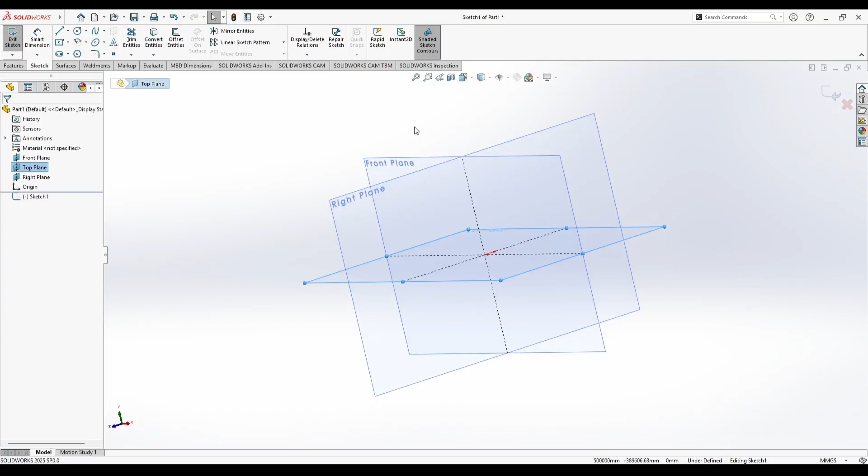This is a complete tutorial where we will go step by step through the modeling process, focusing on how to approach complex product design and break it down into simple, manageable parts.

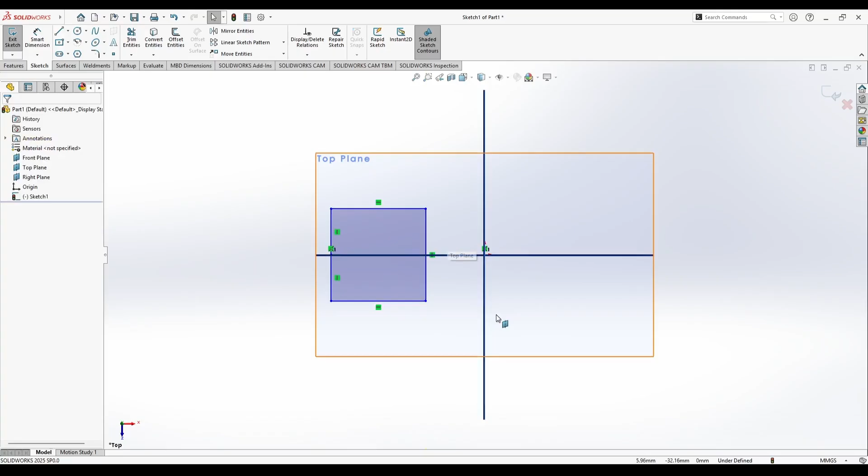We begin by understanding the overall structure of the GPU and setting up the base dimensions. Instead of jumping into details immediately, it is important to start with a clean foundation by creating the main body using simple sketches and extrusions. This gives us a solid reference for adding all the other features later.

Keeping your sketches fully defined and organized at this stage will make the entire modeling process much smoother and more controlled. Once the base is ready, we start building the outer casing.

This involves adding thickness, applying fillets, and shaping the edges to match the real design. The key here is to focus on proportions and symmetry rather than perfection in the first attempt. You can always refine details later, but having the correct overall form is essential. Using features like fillet and chamfer helps in achieving smooth transitions and a more realistic appearance.

After that, we move on to one of the most recognizable parts of the GPU, which is the cooling fan. Instead of modeling everything at once, we create a single fan by designing the hub and then building the blades using patterns. Circular patterns are extremely useful here, as they allow you to replicate one blade across the entire fan evenly.

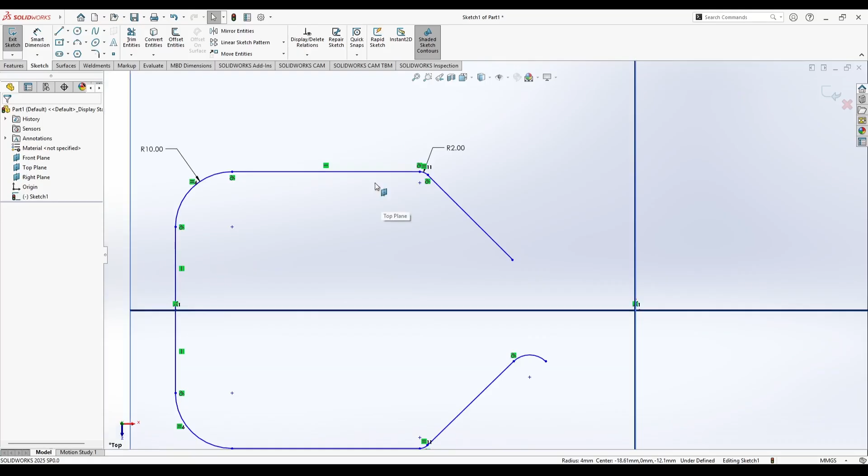Once one fan is complete, it becomes much easier to duplicate or mirror it to create the second fan, saving time and maintaining consistency.

Next, we focus on adding smaller details that bring the model to life. This includes features like mounting sections, vents, and cutouts. These elements may seem minor, but they play a huge role in making the model look realistic and complete.

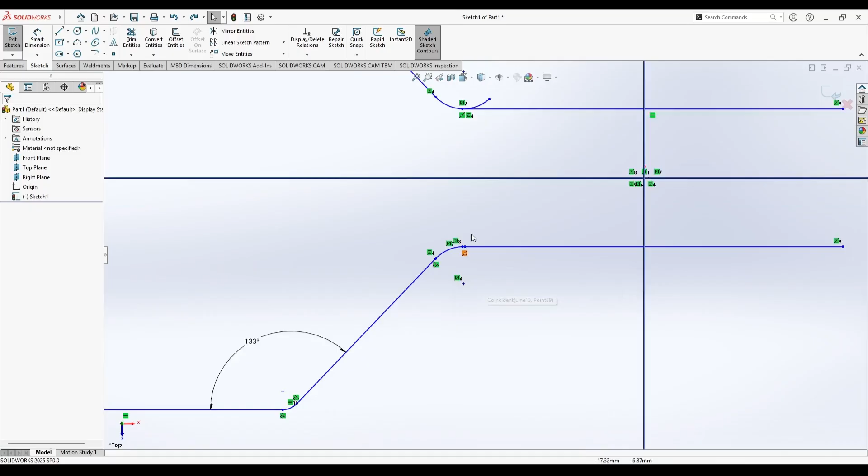At this stage, using reference images can help you understand where to place these details and how they should look. The goal is not to copy every dimension exactly, but to capture the visual essence of the design.

As the model becomes more complex, maintaining a clean feature tree becomes very important. Naming your features, organizing sketches, and following a logical sequence will help you avoid confusion later. This is especially useful if you need to make changes or improvements to the model. A well-structured workflow is what separates a beginner from a more advanced CAD user.

Once the main structure of the GPU is complete, we shift our focus toward refining the model by adding more detailed features and improving overall accuracy.

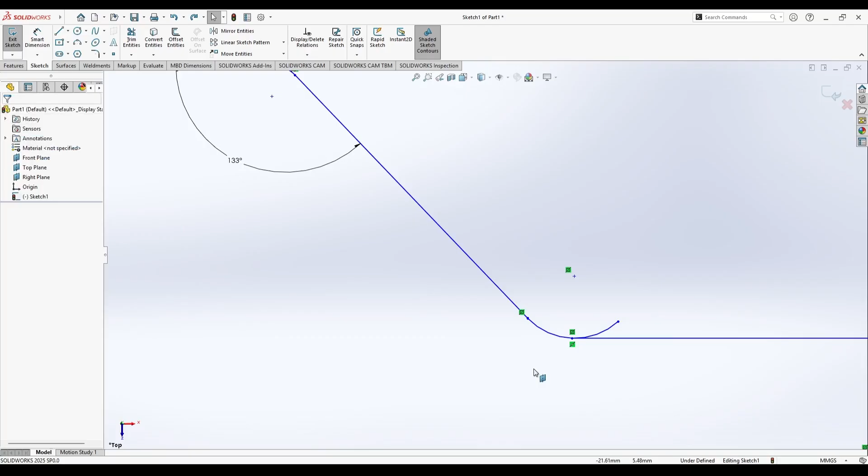This stage is all about enhancing the design step by step, starting with secondary features like edge cuts, grooves, mounting sections, and ventilation areas. Instead of rushing into complex geometry, the idea is to carefully observe the reference design and gradually introduce these elements using simple tools like extrude cuts, patterns, and fillets.

This approach helps maintain control over the model and avoids unnecessary complications. At this point, it becomes important to think about how different parts of the GPU are logically built.

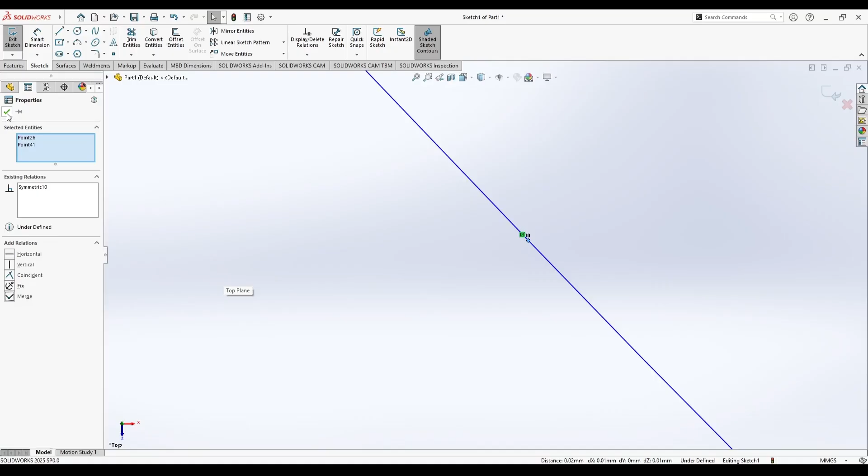Rather than treating it as a single object, breaking it into sections such as the casing, fan housing, and structural supports makes the workflow much more manageable. Each section can be modeled independently and then combined to form the complete design. This not only improves accuracy, but also makes it easier to modify specific parts later without affecting the entire model.

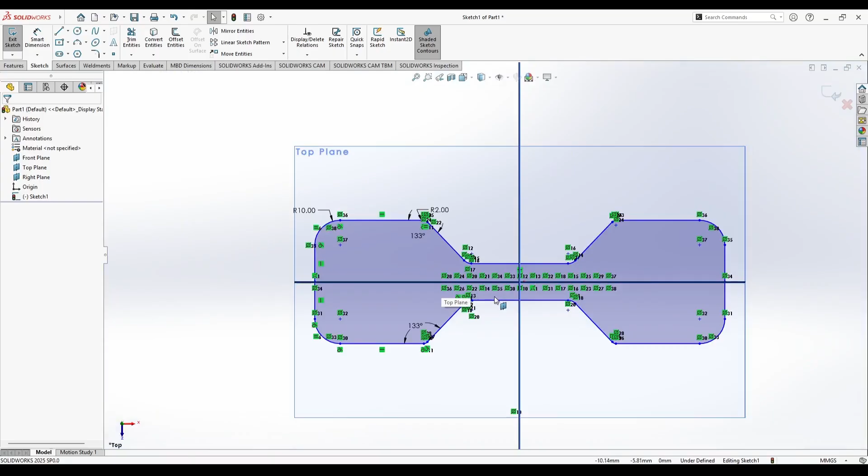As we continue, symmetry plays a major role in speeding up the process. Features like fans, vents, and repeated patterns do not need to be created multiple times from scratch. Instead, tools like mirror and circular pattern can be used to replicate geometry efficiently while maintaining consistency. This not only saves time, but also ensures that the design remains balanced and aligned.

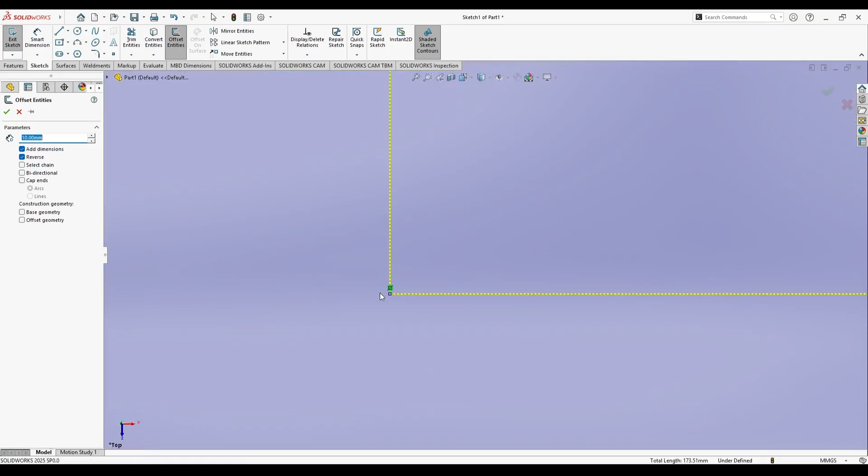Another key aspect during this stage is maintaining clean and well-defined sketches. Many beginners face issues because their sketches are not fully constrained, which leads to unexpected changes later in the model. By fully defining sketches and using proper dimensions, you ensure that your design remains stable and predictable. This becomes especially important when working on complex models like a GPU, where small errors can affect multiple features.

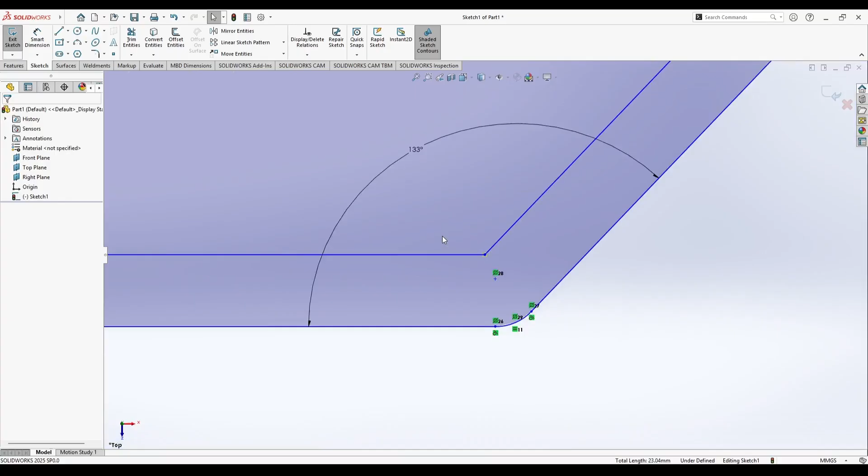As more details are added, the feature tree naturally becomes larger, so organizing your workflow is critical. Renaming features, grouping related operations, and following a logical order will help you stay in control of the design. This also makes it easier to revisit and edit specific features if needed, which is a common requirement in real-world projects.

As we move further into the modeling process, the focus shifts toward capturing finer details that make the model look complete and realistic.

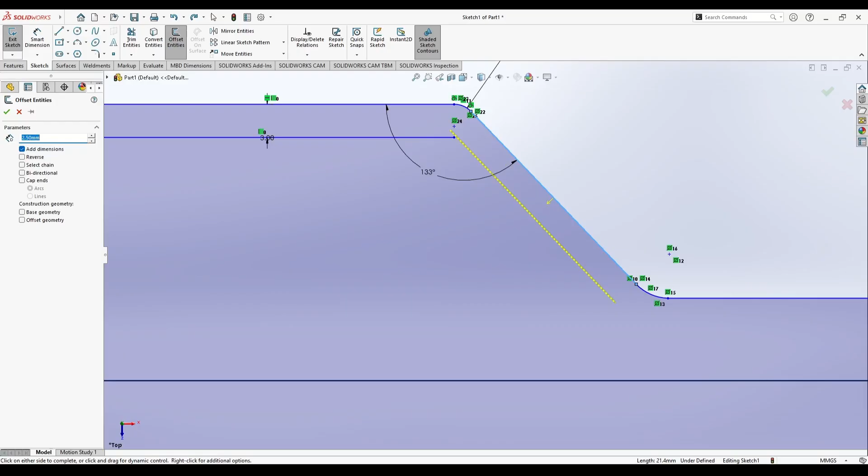At this stage, it is important to carefully observe the reference design and identify repeating patterns, small geometric variations, and functional elements that define the overall appearance of the GPU. Instead of trying to recreate everything in one go, the idea is to isolate each feature and build it step by step. This could include refining edges, adding subtle cutouts, and shaping transitions between different surfaces so that the model starts to resemble a real product rather than a rough structure.

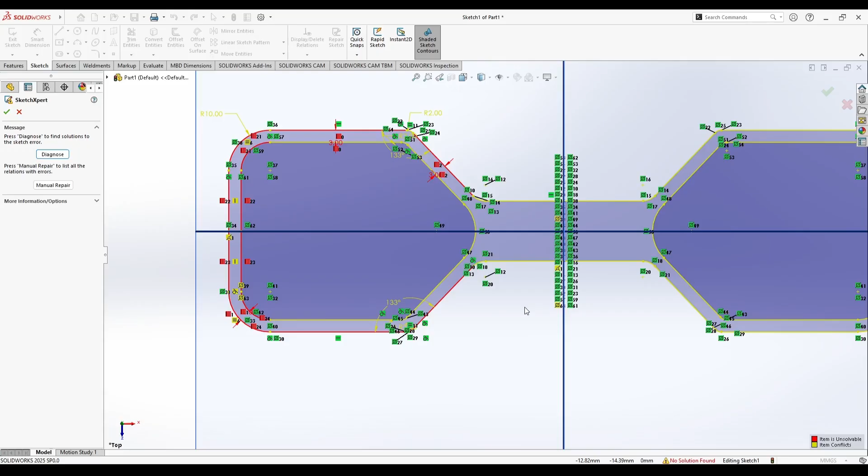One effective approach during this phase is to think in terms of layers. Start with the primary geometry, then move to secondary features, and finally focus on micro-level details. This layered workflow ensures that your model remains clean and organized, and it prevents errors that usually occur when too many features are added without a clear structure.

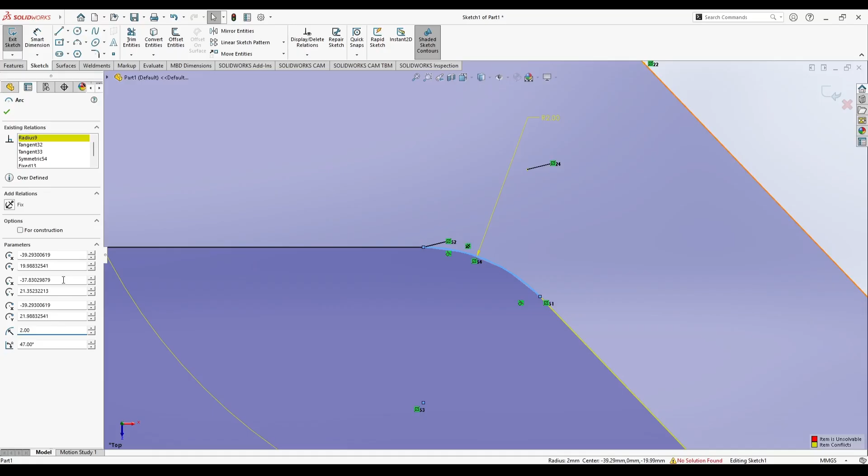For example, once the main body and fan housing are complete, you can begin adding ventilation slots, screw placements, and small design accents that enhance realism. These details might seem minor individually, but together they significantly improve the overall quality of the model.

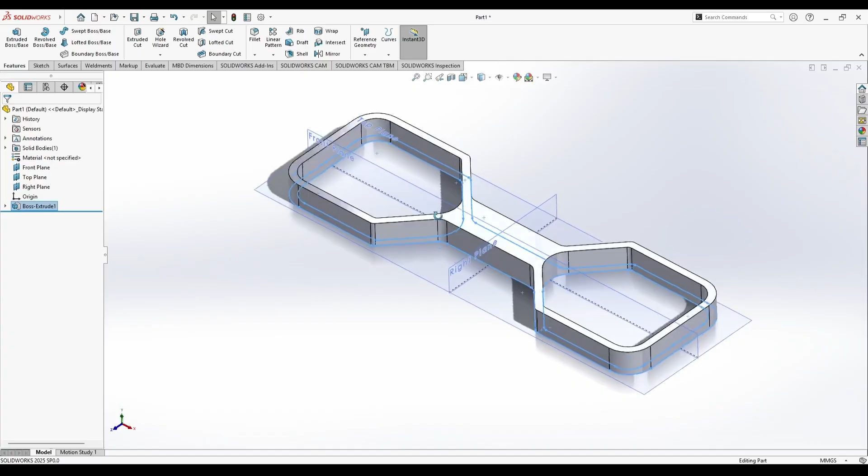Another important consideration is the use of reference geometry, such as planes and axes. These tools help you position features accurately and maintain alignment throughout the design. When working on complex shapes or angled features, creating additional reference planes can make sketching much easier and more precise. This is especially useful when dealing with non-standard geometries or when certain features are not aligned with the main planes of the model. Proper use of reference geometry not only improves accuracy, but also makes your workflow more efficient.

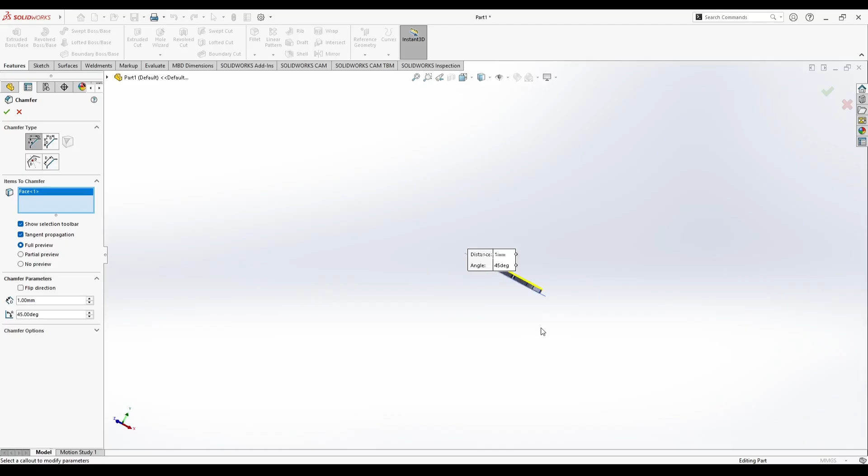As the model grows, it becomes essential to manage relationships between different features. SolidWorks allows you to create dependencies between sketches and features, which can be very powerful when used correctly. For instance, if multiple features are based on a single reference dimension, updating that dimension will automatically adjust all related features. This parametric approach is one of the biggest advantages of CAD modeling, as it allows for flexibility and quick modifications without rebuilding the entire model from scratch.

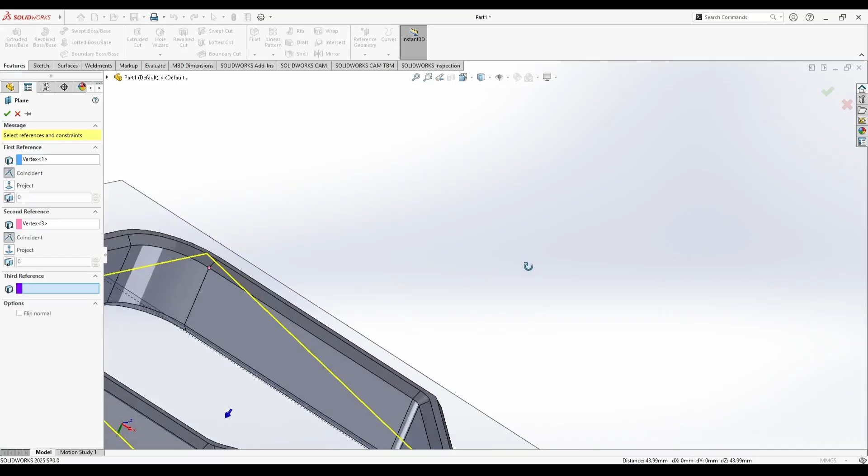During this stage, it is also helpful to frequently evaluate your model from different angles. Rotating the model, zooming in on details, and checking proportions visually can reveal inconsistencies that may not be obvious in a single view. This habit helps you catch errors early and maintain a high level of accuracy throughout the design process. It also improves your ability to judge proportions and aesthetics, which is an important skill in product design.

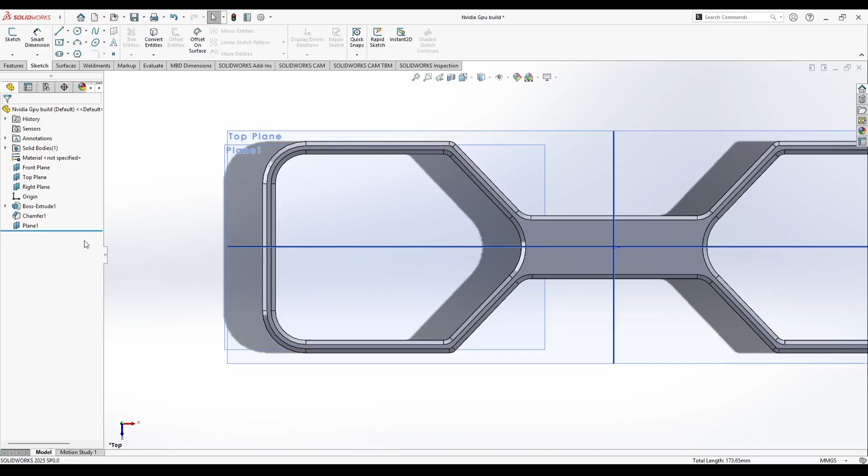Another useful practice is to simplify complex features whenever possible. Not every detail needs to be modeled with extreme precision, especially if it does not significantly affect the visual outcome. Learning to balance detail and efficiency is key to becoming a skilled CAD user. By focusing on the most important features and simplifying less critical ones, you can save time while still achieving a high-quality result.

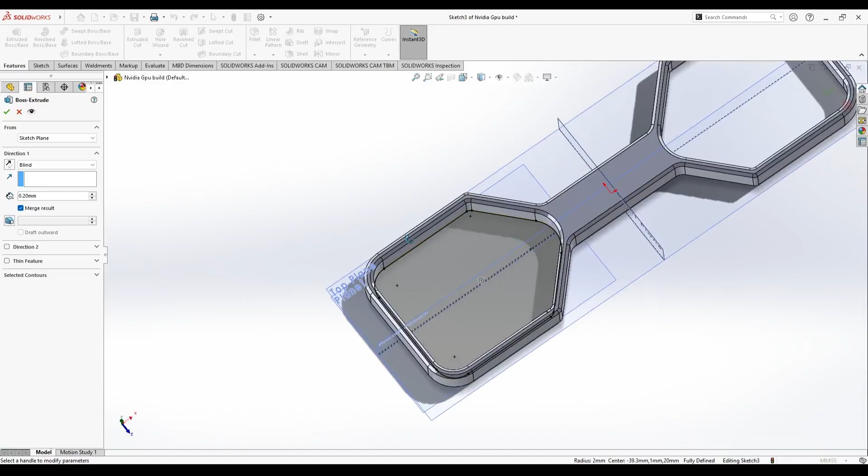As you continue adding features, patterns become increasingly valuable. Linear patterns, circular patterns, and mirror features allow you to replicate geometry quickly and maintain consistency across the model. For example, if you have a set of ventilation holes or repeated cutouts, using a pattern ensures that spacing and alignment remain uniform. This not only improves accuracy, but also reduces the effort required to build complex designs.

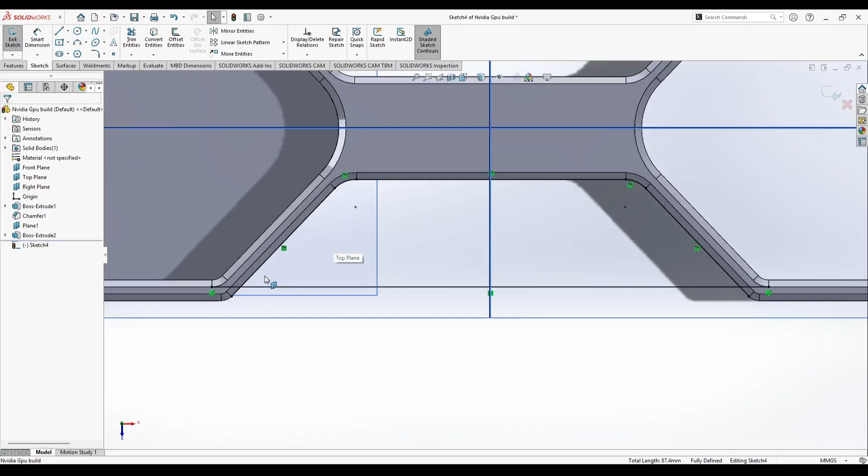At this point, it is also important to ensure that your model remains fully defined and stable. Avoid leaving sketches underdefined, as this can lead to unexpected changes later. Applying proper constraints and dimensions ensures that your design behaves predictably when modifications are made. This is a fundamental aspect of parametric modeling and plays a crucial role in maintaining control over complex projects.

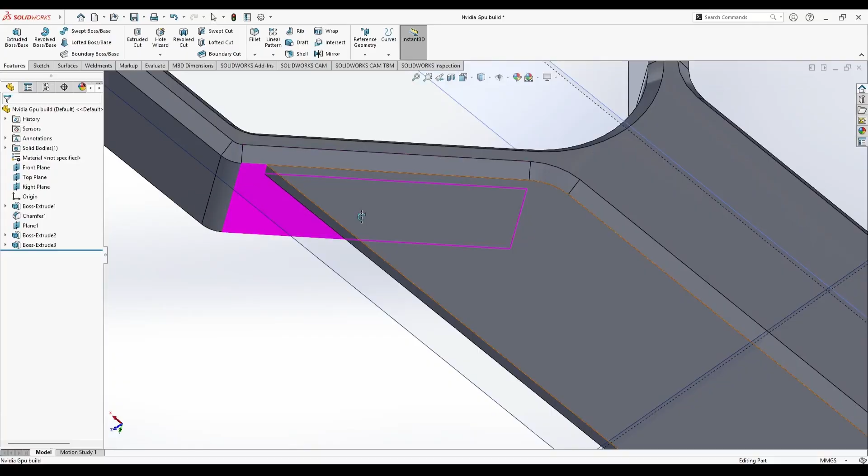Another key aspect of advanced modeling is understanding how different features interact with each other. Sometimes adding a new feature can unintentionally affect existing geometry, especially when working with cuts and fillets. Being mindful of feature order and dependencies helps prevent such issues. If something goes wrong, reviewing the feature tree and adjusting the sequence can often resolve the problem.

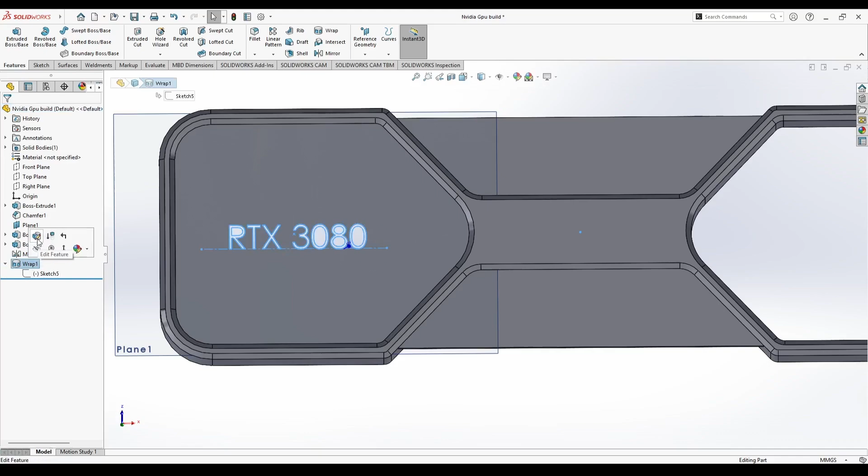As the model nears completion, take some time to review the entire design. Look for any missing details, inconsistencies, or areas that can be improved. This final refinement stage is where you polish the model and ensure that it meets your expectations. It is also a good opportunity to clean up the feature tree, rename important features, and organize your workflow for better clarity. All of these steps contribute to a more structured and professional approach to CAD modeling. Instead of relying on random trial and error, you develop a clear process that can be applied to any complex design. This not only improves your efficiency, but also builds confidence in your ability to handle challenging projects.

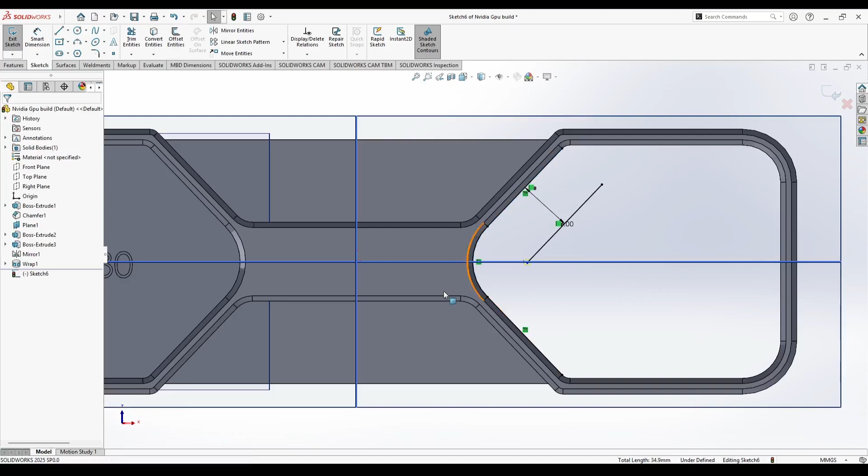Now, taking a step back from the modeling process, it is also interesting to understand the real-world product that inspired this design. The NVIDIA RTX 3080 is part of NVIDIA's Ampere architecture and was released as a high-performance graphics card aimed at gamers, content creators, and professionals who require powerful GPU computing.

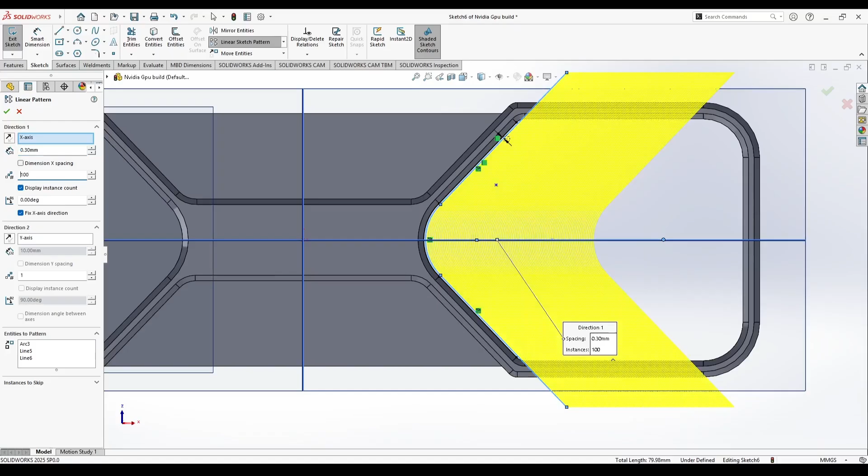It represents a significant leap in performance compared to previous generations, especially in terms of real-time ray tracing and AI-based rendering. One of the standout features of the RTX 3080 is its memory configuration.

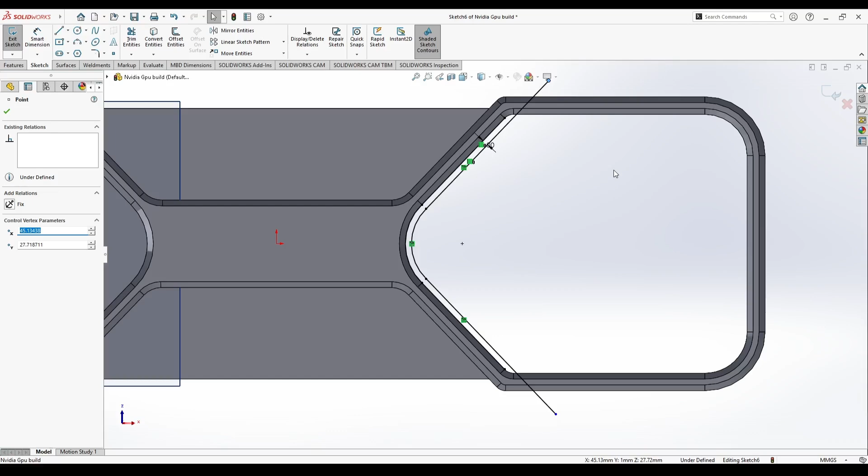It comes equipped with 10 GB of GDDR6X VRAM, which is designed to handle high-speed data transfer for demanding applications such as 4K gaming, 3D rendering, and video editing. The use of GDDR6X memory allows for higher bandwidth compared to traditional GDDR6, enabling faster communication between the GPU and memory. This is particularly important when working with large textures, complex scenes, or high-resolution outputs.

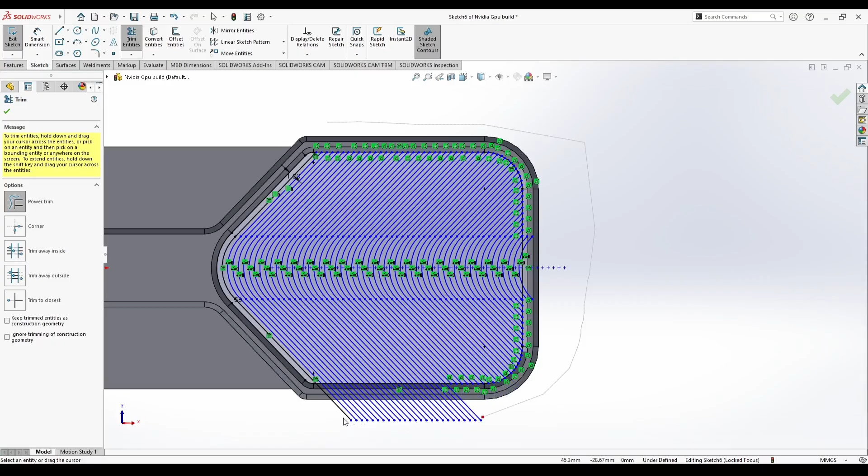The GPU itself contains thousands of CUDA cores, which are responsible for handling parallel processing tasks. These cores allow the graphics card to perform multiple calculations simultaneously, making it extremely efficient for both gaming and professional workloads.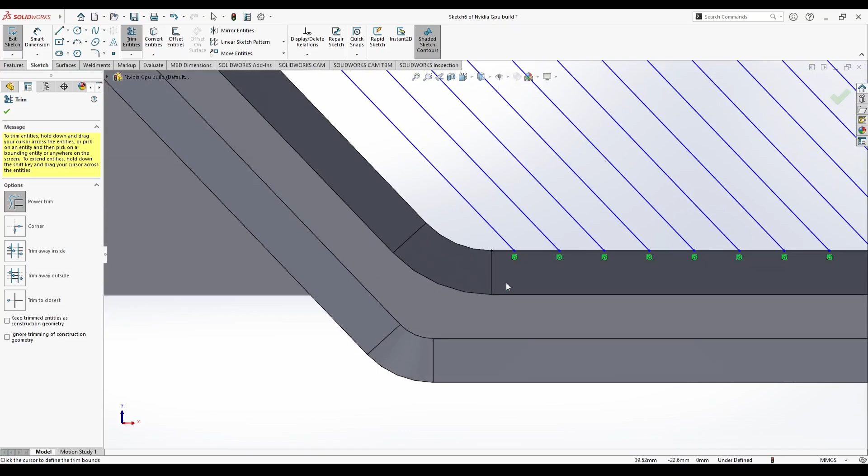In addition to CUDA cores, the RTX 3080 also includes dedicated RT cores for ray tracing and tensor cores for AI-based operations. Ray tracing enables realistic lighting, reflections, and shadows in real time, while tensor cores are used for features like DLSS, which uses artificial intelligence to upscale lower-resolution images to higher resolutions without losing quality.

Another key aspect of the RTX 3080 is its cooling design. The Founders Edition model introduced a unique dual-fan configuration with a push-pull airflow system. One fan draws air through the card, while the other pushes it out, improving thermal performance and maintaining stable temperatures even under heavy loads. This design not only enhances cooling efficiency, but also contributes to the overall aesthetic of the GPU, which is why it is often chosen as a reference for CAD modeling projects.

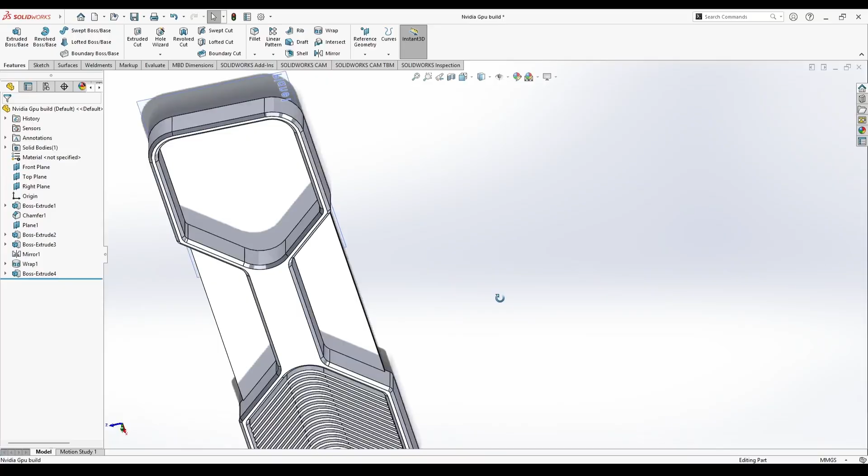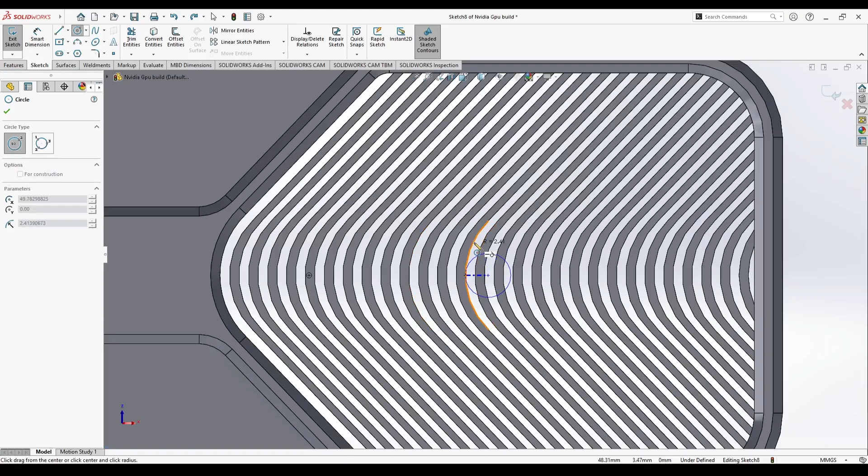In terms of performance, the RTX 3080 is capable of handling modern games at ultra settings with high frame rates, especially at 1440p and 4K resolutions. It also excels in creative applications such as video editing, 3D rendering, and simulation, where GPU acceleration can significantly reduce processing time. Software like Blender, Adobe Premiere Pro, and various CAD rendering tools can take advantage of the GPU's power to deliver faster and smoother workflows.

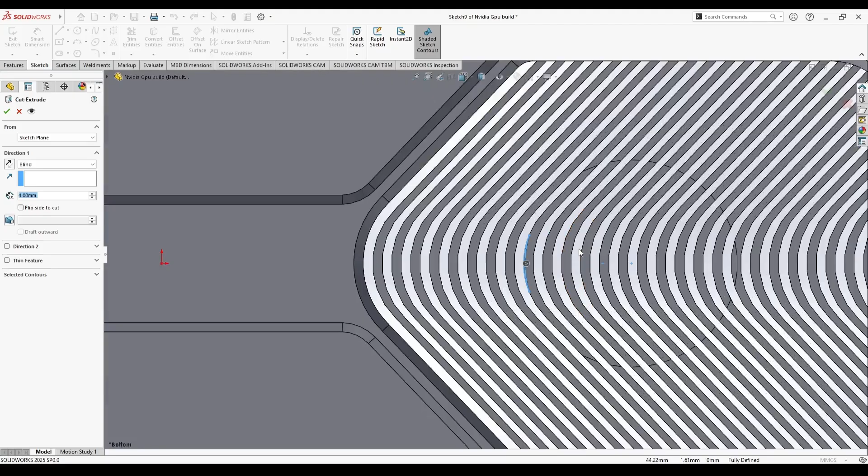Power consumption is another important factor to consider. The RTX 3080 typically requires a high wattage power supply, as it is designed to deliver top-tier performance. This means that proper system configuration and cooling are essential when using such a GPU in a real setup. The card also uses advanced connectors and power delivery systems to ensure stable operation under heavy workloads.

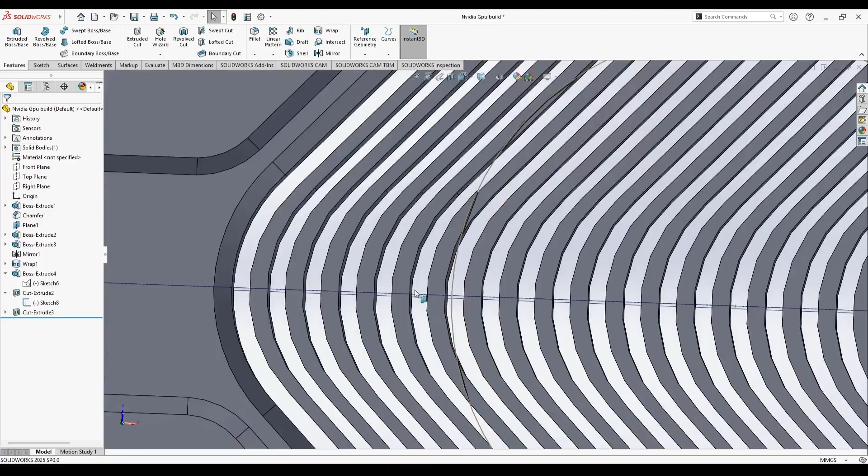From a design perspective, the RTX 3080 combines both functionality and aesthetics. Its sleek metallic finish, angular geometry, and symmetrical layout make it visually appealing while also serving practical purposes such as heat dissipation and structural strength. These characteristics make it an excellent subject for CAD modeling, as it challenges you to replicate both technical and visual aspects of a real product.

Understanding these real-world features not only adds context to the modeling process, but also helps you appreciate the level of engineering involved in such devices. When you model something like the RTX 3080, you are not just creating a shape, but also learning how complex systems are designed, optimized, and manufactured. This deeper understanding enhances your ability to create more accurate and meaningful designs in the future.

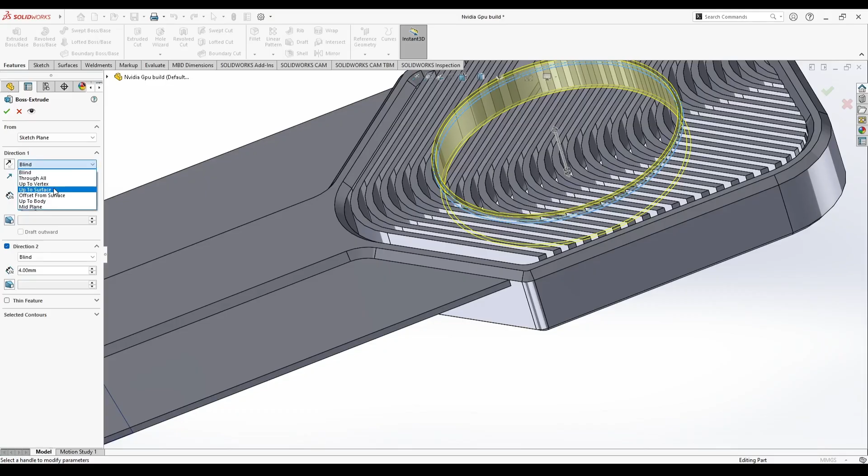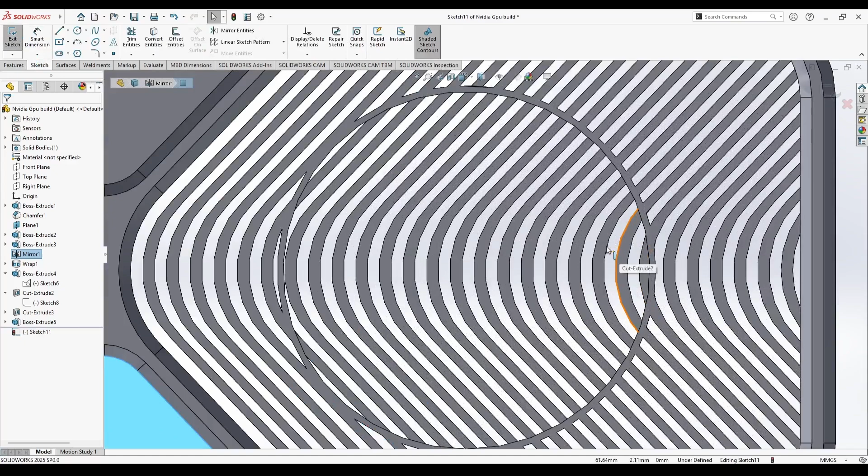It also trains you to think beyond geometry and start considering real engineering constraints such as heat dissipation, airflow management, structural rigidity, and component placement. For example, the positioning of the fans, the spacing of ventilation areas, and the thickness of the casing are not random design choices. They are all carefully engineered to ensure optimal cooling and performance. When you replicate these elements in your model, you begin to understand how design decisions are influenced by functionality as much as aesthetics.

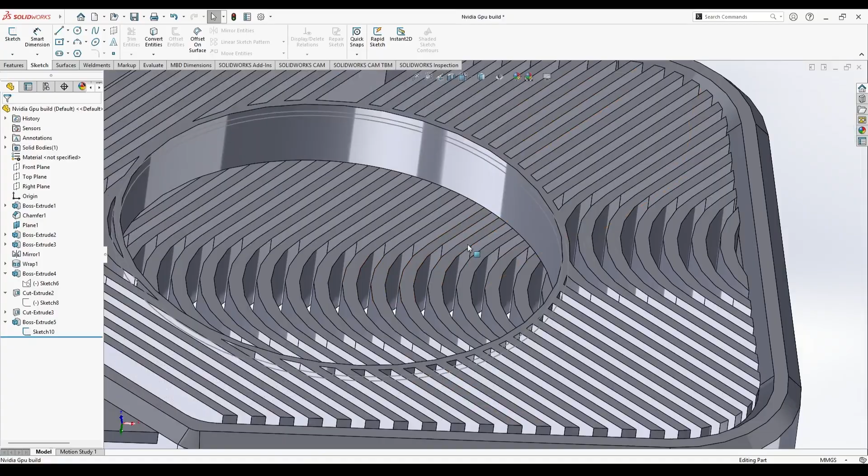Building on this deeper understanding, it is also useful to look at the RTX 3080 from a more technical engineering perspective, especially in terms of how its internal architecture influences the external design that we model. The RTX 3080 is based on NVIDIA's Ampere architecture, fabricated on an advanced process node that allows a high density of transistors to be packed into a relatively small die area. This enables the GPU to deliver significantly higher computational performance while maintaining efficiency compared to older generations.

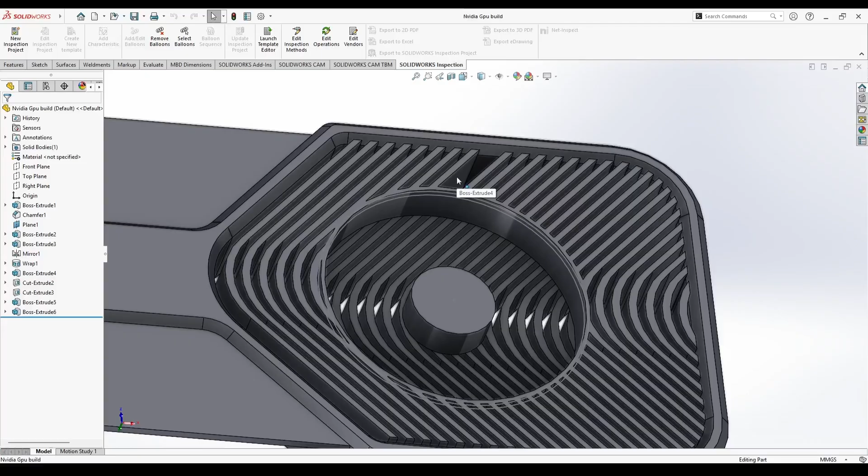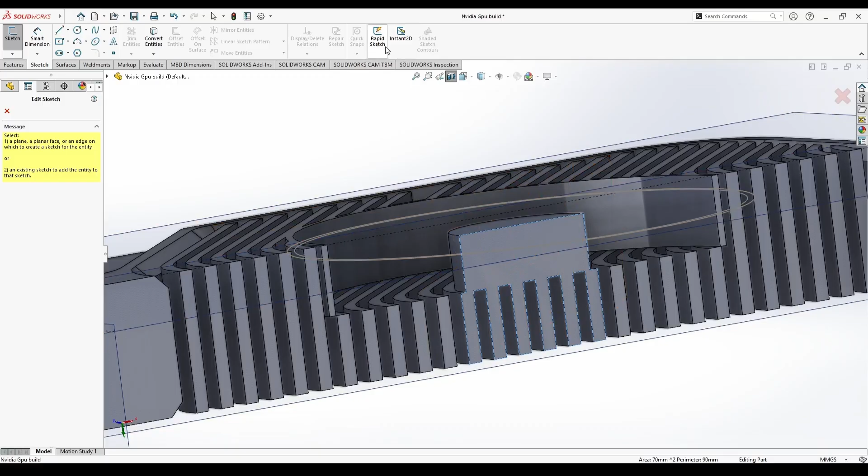The internal GPU die contains multiple processing units organized into streaming multiprocessors, each responsible for handling parallel workloads such as shading, physics calculations, and rendering tasks. A key technical feature of the RTX 3080 is its massive parallel processing capability, driven by thousands of CUDA cores. These cores operate simultaneously, allowing the GPU to process large amounts of data in parallel, which is essential for real-time graphics rendering and compute-heavy applications.

In addition to CUDA cores, the presence of dedicated RT cores enables hardware-accelerated ray tracing. This allows the GPU to calculate realistic lighting interactions, such as reflections, refractions, and shadows, in real time. From a design perspective, this level of performance requires efficient thermal management, which directly influences the size, shape, and airflow pathways of the GPU housing that we model.

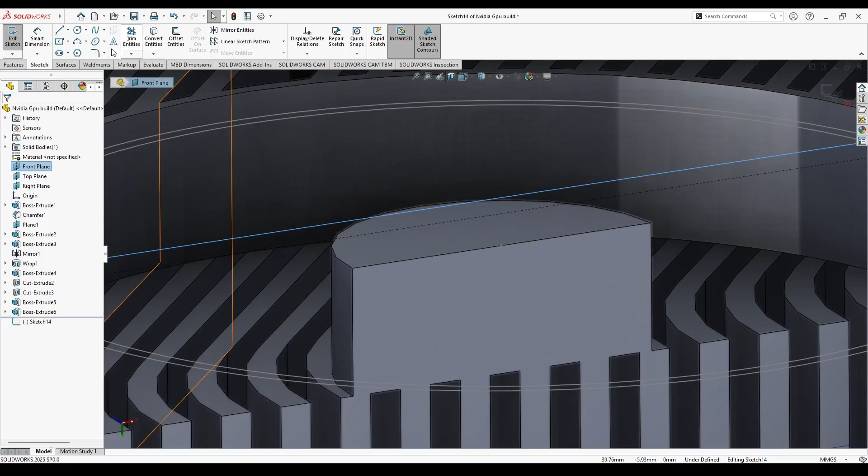Another important technical aspect is the memory subsystem. The RTX 3080 uses high-speed GDDR6X memory, which operates at very high data rates to ensure fast communication between the GPU and memory. This is supported by a wide memory interface, allowing large amounts of data to be transferred quickly.

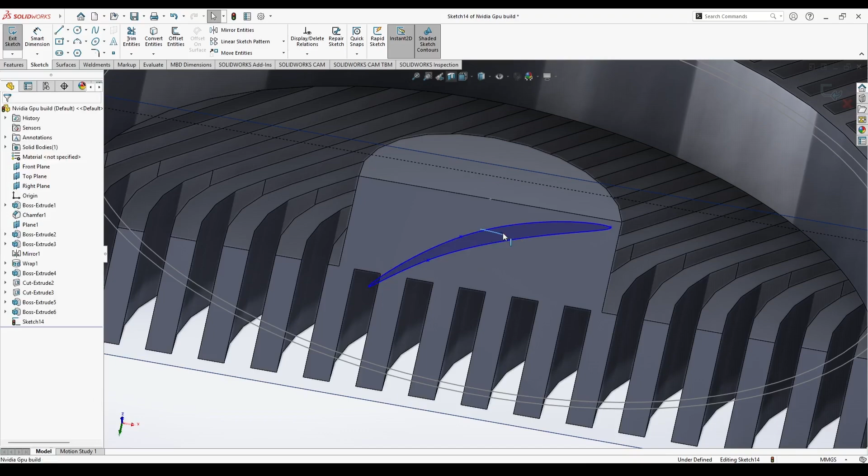The placement of memory modules around the GPU die on the PCB affects heat distribution and cooling requirements. While we may not model these internal components in detail, understanding their arrangement helps explain why certain areas of the GPU require more cooling and why vents and airflow channels are positioned in specific locations.

Power delivery is another critical factor. The RTX 3080 requires a robust power delivery system to handle its high performance. This includes voltage regulation modules and power connectors that supply stable and efficient power to the GPU. These components generate heat and must be properly cooled, which again influences the design of the heatsink and airflow system.

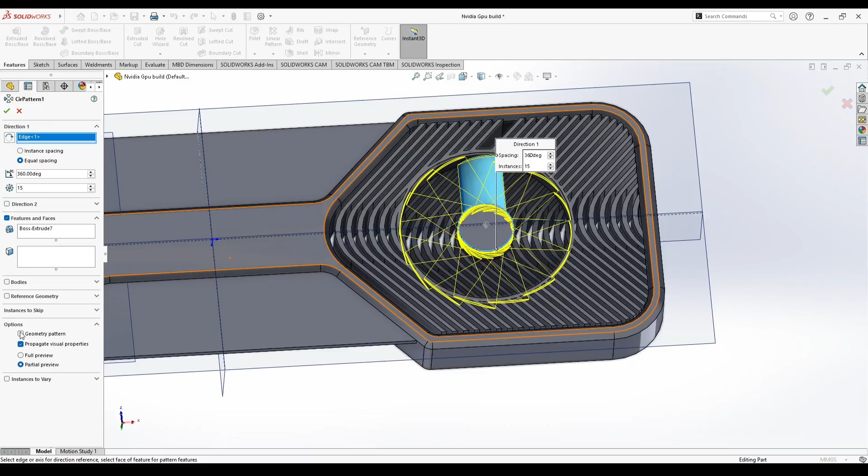The external design often reflects these internal requirements through features like thicker sections, reinforced areas, and strategically placed openings for ventilation. Thermal design is one of the most important engineering challenges in a GPU.

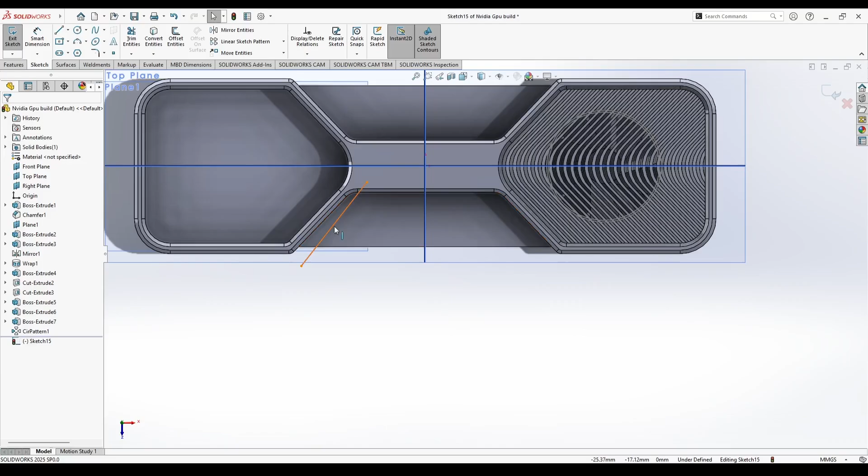The RTX 3080 uses a combination of heat sinks, heat pipes, and fans to dissipate heat effectively. Heat generated by the GPU die is transferred through a thermal interface material to a heatsink, where it is spread out and cooled by airflow.

The dual fan configuration in many RTX 3080 designs creates a controlled airflow path that moves heat away from critical components. This is why, when modeling the GPU, attention to fan placement, vent design, and spacing becomes essential for achieving a realistic and functionally accurate representation.

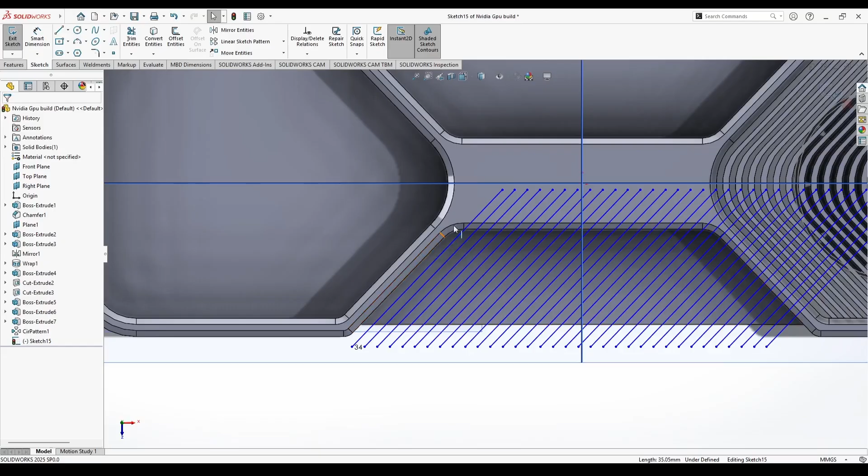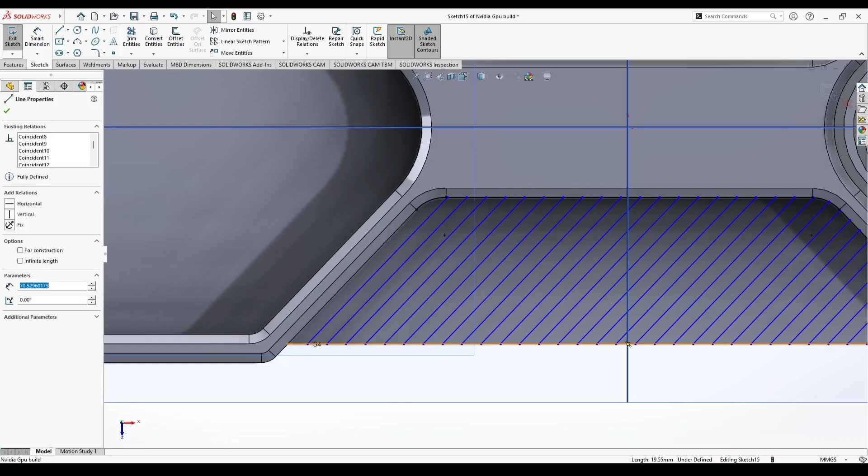Signal routing and PCB design also play a major role in the overall performance of the GPU. High-speed data signals must be carefully routed to minimize interference and maintain signal integrity. This requires precise layout and spacing of components on the PCB.

While these details are mostly internal, they indirectly affect the external design, such as the positioning of connectors and the overall dimensions of the card. Understanding these constraints gives you a better appreciation of why the GPU has a particular shape and layout.

From a mechanical standpoint, structural integrity is also considered in the design. GPUs are relatively heavy due to their cooling systems, so the casing and internal frame must be strong enough to support the weight without bending or deforming. This is why you often see reinforced edges, mounting points, and rigid structures in the design.

When modeling, incorporating these elements adds realism and helps simulate how the product would exist in a real environment.

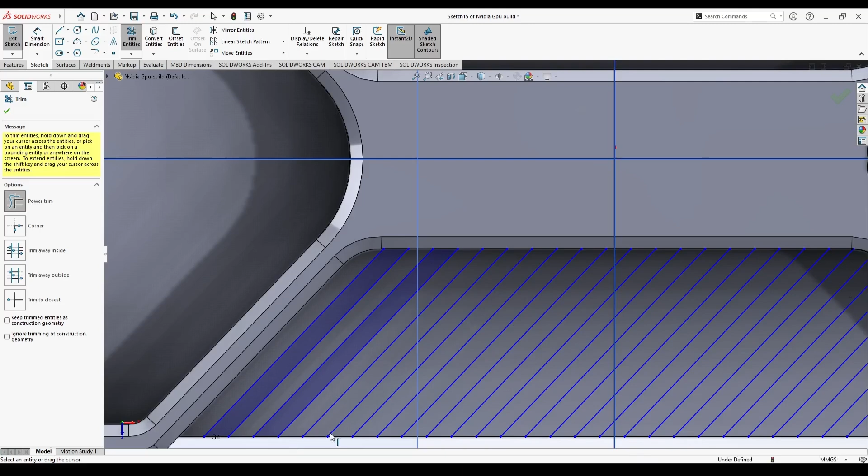Another technical detail worth noting is the integration of I/O interfaces such as HDMI and DisplayPort outputs. These connectors must be precisely aligned and securely mounted to ensure reliable connections with external devices. Their placement is standardized to fit within computer cases, which imposes additional design constraints. Including these elements in your model not only improves accuracy, but also reinforces your understanding of how products must conform to industry standards.

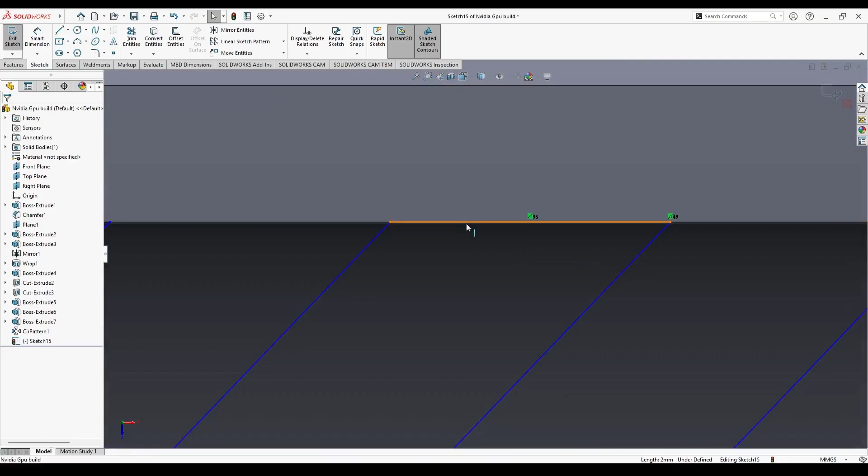Continuing with the technical exploration, the NVIDIA RTX 3080 is a significant advancement over previous GPU generations because of its combination of raw computational power and energy efficiency.

Built on NVIDIA's Ampere architecture, the GPU uses second-generation RT cores and third-generation tensor cores, which drastically improve ray tracing performance and AI-powered workflows. These cores enable features like real-time ray traced shadows, reflections, global illumination, and DLSS, deep learning supersampling, which intelligently upscales images to higher resolutions without compromising performance.

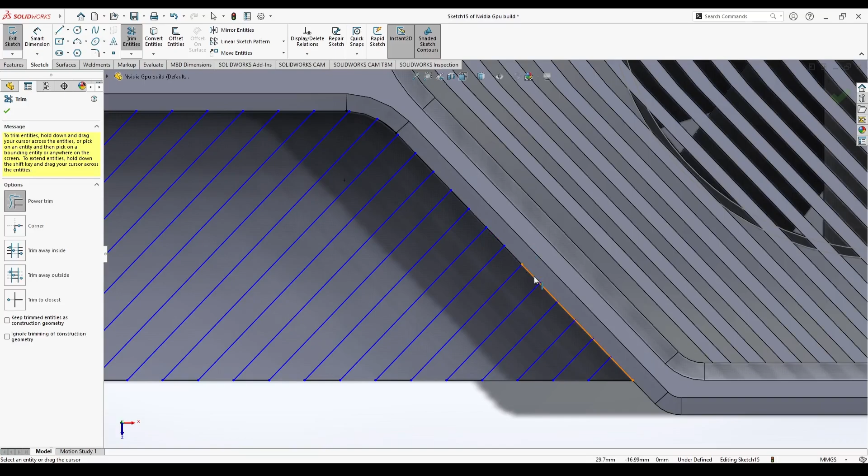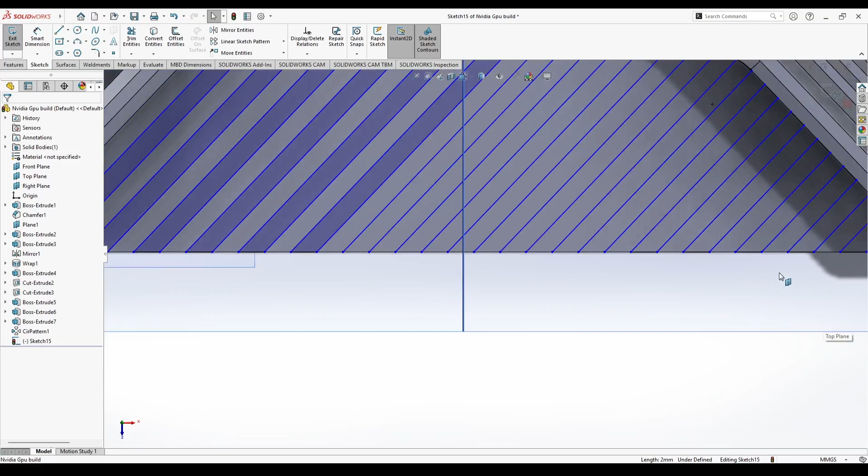From a modeling standpoint, understanding these internal functional components provides context for why the GPU is designed with such attention to cooling, component placement, and airflow. Each fan, vent, and heat pipe is purposefully positioned to manage heat produced by these highly parallel processing units.

The GPU die itself is a marvel of modern semiconductor engineering. It contains billions of transistors fabricated using an 8-nanometer process node, allowing massive processing density in a compact area.

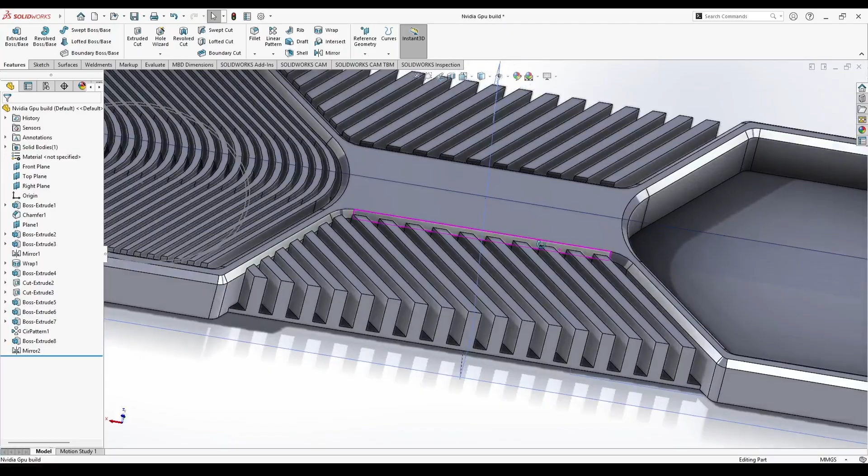The die is the core computational unit, and its placement on the PCB must be optimized for minimal thermal resistance and efficient signal distribution. While the die is internal, in CAD modeling, this affects the surrounding structure, such as the heatsink baseplate, fan positioning, and case thickness.

A designer modeling the RTX 3080 needs to understand that these seemingly aesthetic features are actually highly functional.

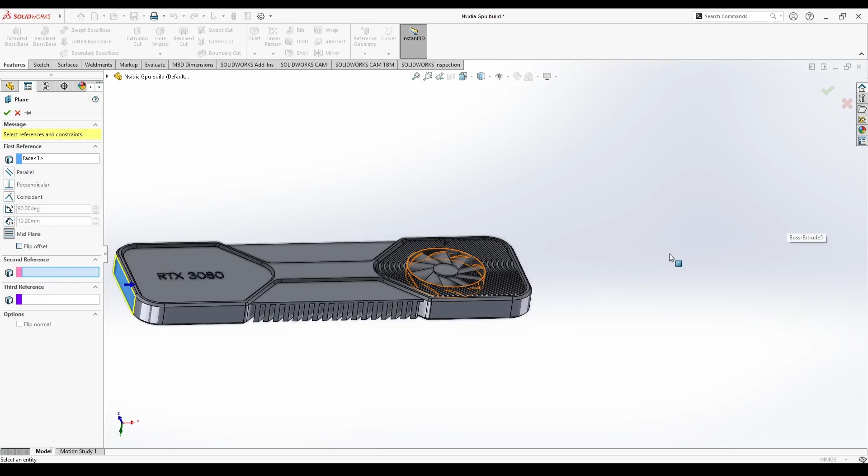The VRAM system is another critical area. The RTX 3080's 10 gigabytes of GDDR6X memory modules are distributed around the GPU die to ensure short, high-speed communication paths. This reduces latency and maximizes bandwidth, which is crucial for 4K gaming, 3D rendering, and high-fidelity simulations.

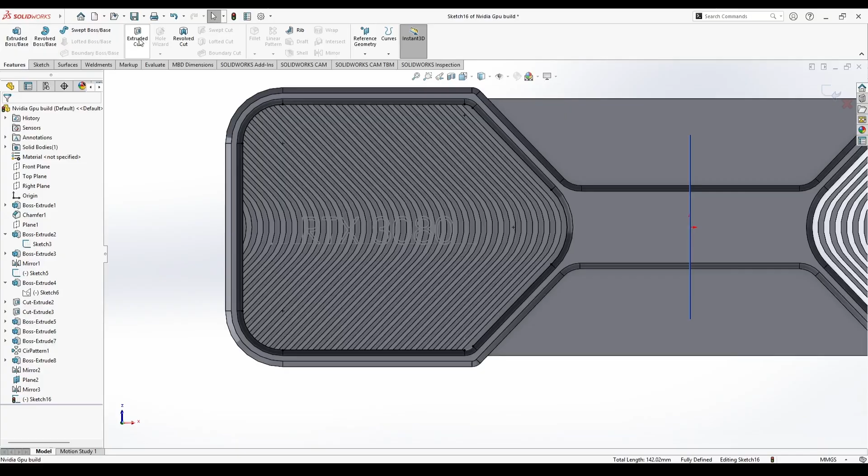In terms of thermal design, memory chips also generate heat, albeit less than the GPU die, so they are strategically located near cooling channels and airflow paths. This explains why, in CAD modeling, certain areas of the card have vents, cutouts, or raised sections to allow airflow over these heat-generating components.

Power delivery is another essential aspect. The RTX 3080 requires a powerful and stable supply to achieve peak performance. This is handled through multi-phase voltage regulator modules, VRMs, on the PCB. These VRMs convert power from the PSU and regulate voltage to the GPU and memory. Each VRM produces heat, necessitating additional thermal management features such as heat sinks or thermal pads.

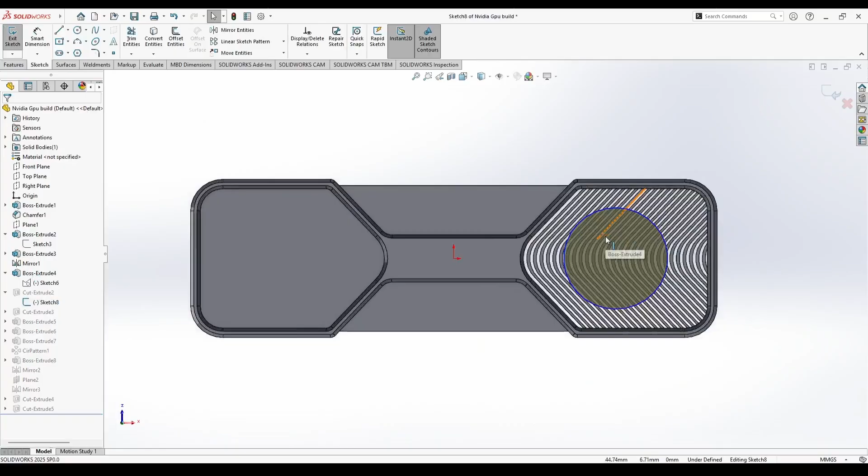When modeling the GPU, the power delivery system may influence not only the PCB layout, but also the overall thickness and placement of the cooling system. Designers need to account for these real-world constraints to create an accurate and believable model.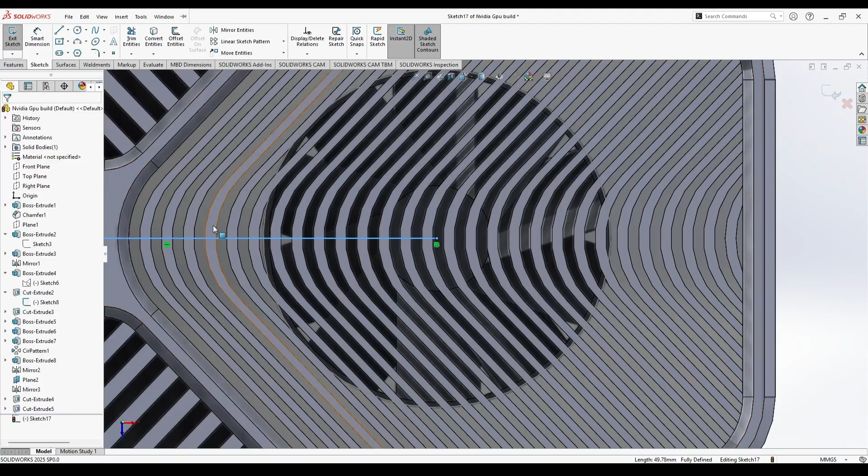Thermal engineering is arguably one of the most critical considerations in a high-end GPU. The RTX 3080 employs a combination of heat pipes, vapor chambers, and high-conductivity materials to move heat away from the GPU die and VRAM modules. The dual-fan system and shroud design are engineered to maximize airflow efficiency. Fans are oriented to push air through the heatsink fins and out of the case, creating a controlled thermal path.

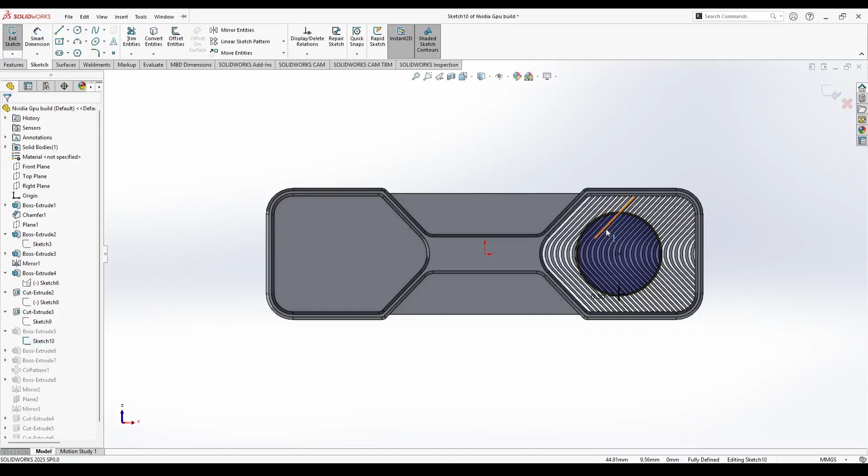When modeling the GPU, these fans and vents are not purely decorative. They are functional representations of these engineering choices. Accurate CAD modeling of these features requires understanding airflow patterns and the purpose of each opening or grill.

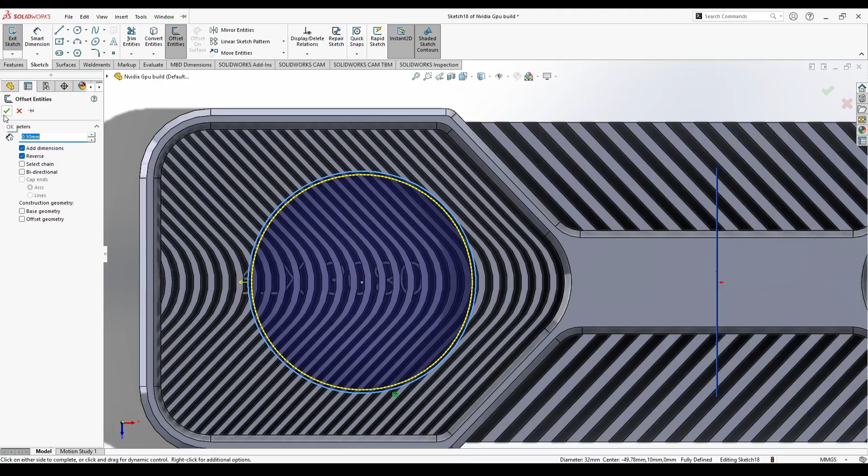From a structural perspective, the GPU must endure physical stress during installation and operation. High-end GPUs, like the RTX 3080, are relatively heavy due to their large heat sinks and multiple fans. Therefore, the casing and internal frame are reinforced to prevent bending or warping, which could compromise thermal contact with the GPU die and VRAM modules.

In CAD, this translates to including realistic thicknesses, fillets for strength, and mounting features that reflect actual hardware constraints. These considerations are crucial for creating a model that not only looks realistic, but also makes sense from an engineering standpoint. Signal integrity and PCB layout are also highly relevant.

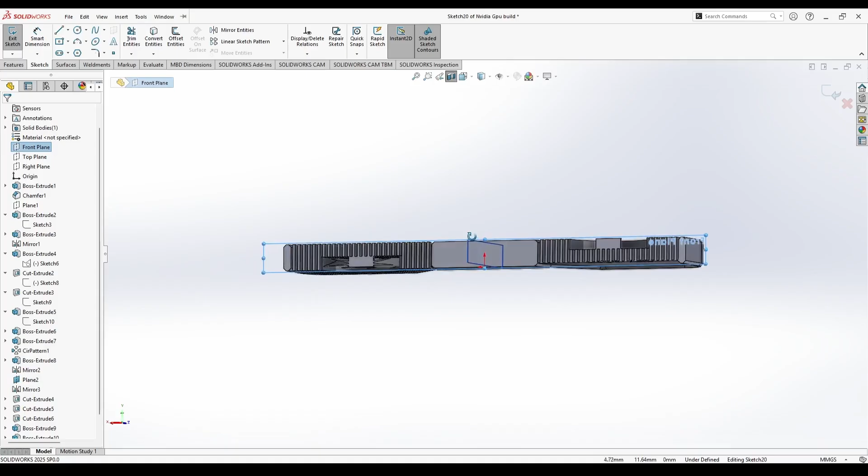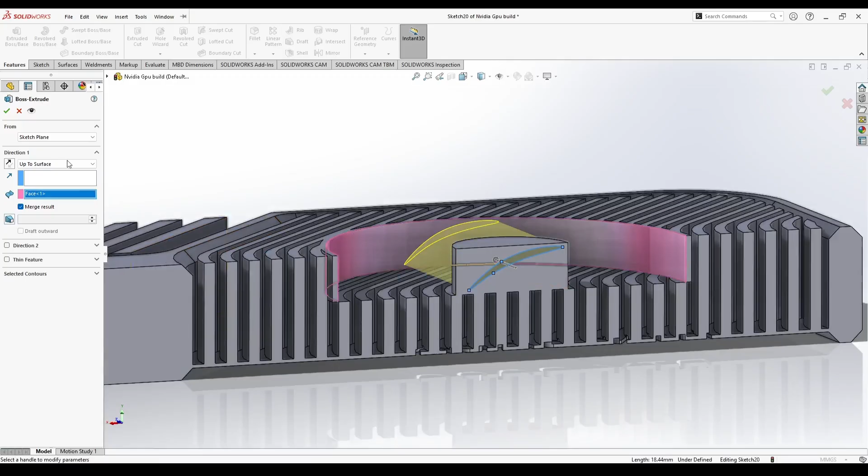High-speed memory and GPU signals are sensitive to noise and interference. This requires careful placement of components and routing of traces. Connectors for HDMI, DisplayPort, and PCIe must be positioned precisely to maintain compatibility with standard PC cases. These constraints influence the external form factor, including edge lengths, connector cutouts, and overall thickness. Understanding these elements helps CAD designers appreciate why the GPU has the shape it does and why certain features, like notches and gaps, exist.

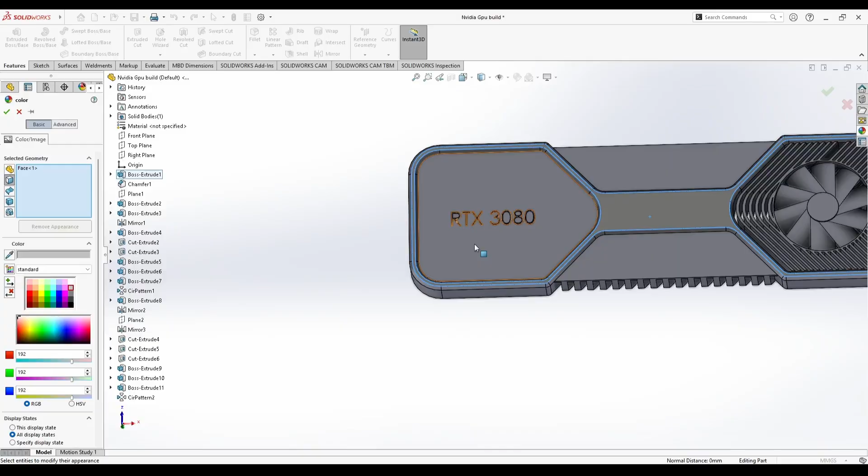The exterior aesthetics of the RTX 3080 are also influenced by thermal and structural engineering. Sharp edges, angular surfaces, and vents are all designed to improve airflow and heat dissipation while giving the card a modern and aggressive look. Fillets and chamfers are not just visually appealing. They help reduce stress concentrations in the metal parts and improve manufacturability. Including these details in your CAD model adds authenticity and demonstrates an understanding of design for manufacture principles.

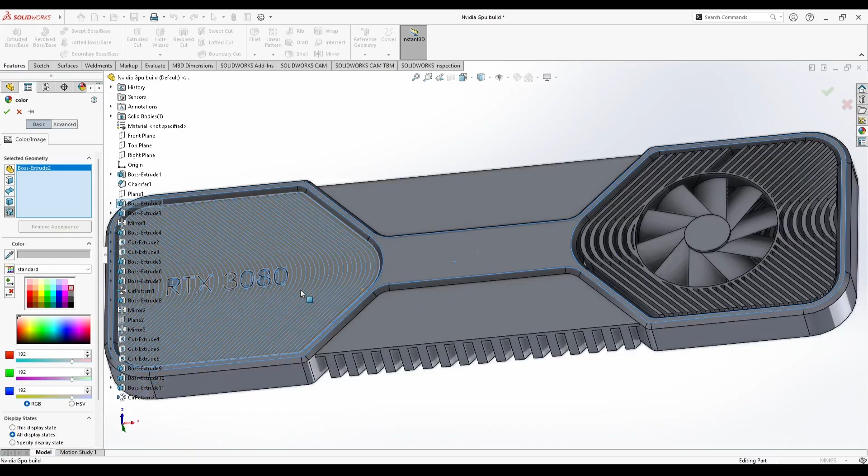Another technical consideration is weight distribution. GPUs must be balanced within a computer case to prevent sagging over time. NVIDIA often uses a combination of metal and high-strength polymers in the casing to achieve a balance of rigidity and weight reduction. In CAD, modeling these structural elements accurately helps convey the functional design of the card and allows for visualization of how it would sit on a motherboard.

This is why including the backplate, support brackets, and connector reinforcements in your model is essential for realism.

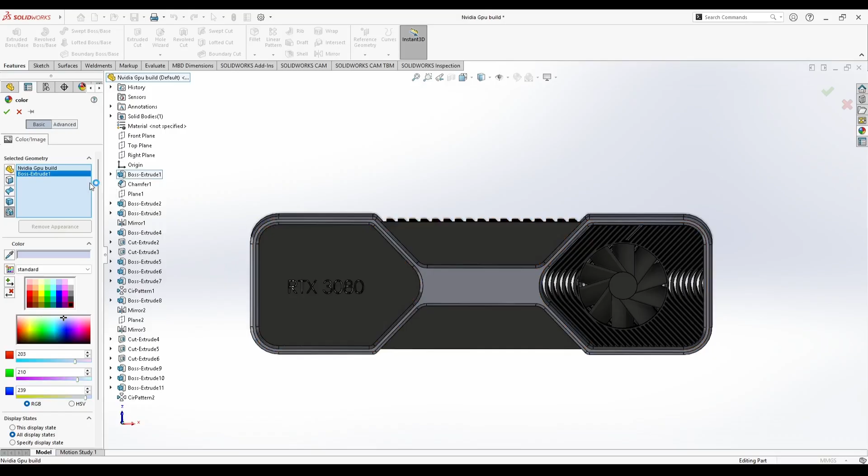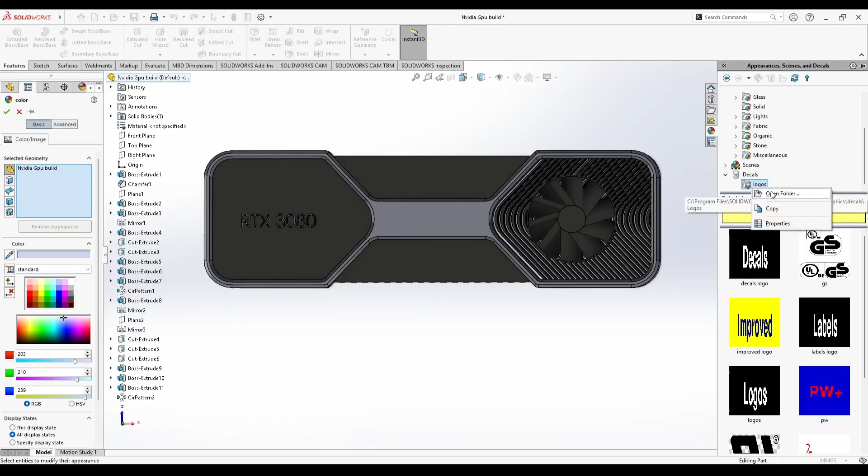The cooling system also interacts with software performance. RTX 3080 cards adjust fan speeds dynamically based on GPU temperature and workload. This means the fan size, blade angle, and shroud design are optimized to move maximum air efficiently while keeping noise levels low. When modeling, the fan blade geometry, spacing, and orientation can be replicated to reflect these real-world constraints, giving the render a technical authenticity beyond aesthetics.

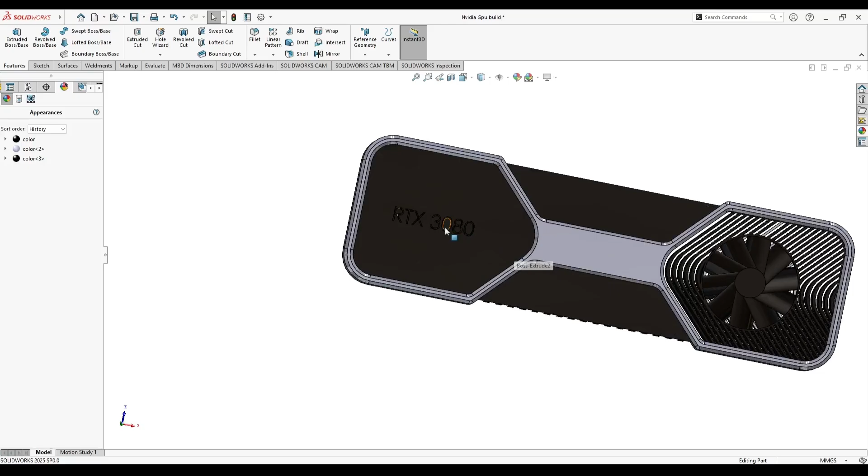Finally, features like RGB lighting, branding, and design accents also have technical reasons. RGB LEDs often require separate wiring channels and power distribution, which influence space allocation and internal geometry. Even small design details like logos, vents, and color accents are considered carefully to avoid blocking airflow or affecting cooling efficiency. Including these elements in your CAD model not only improves visual fidelity, but also demonstrates a professional understanding of product design principles.

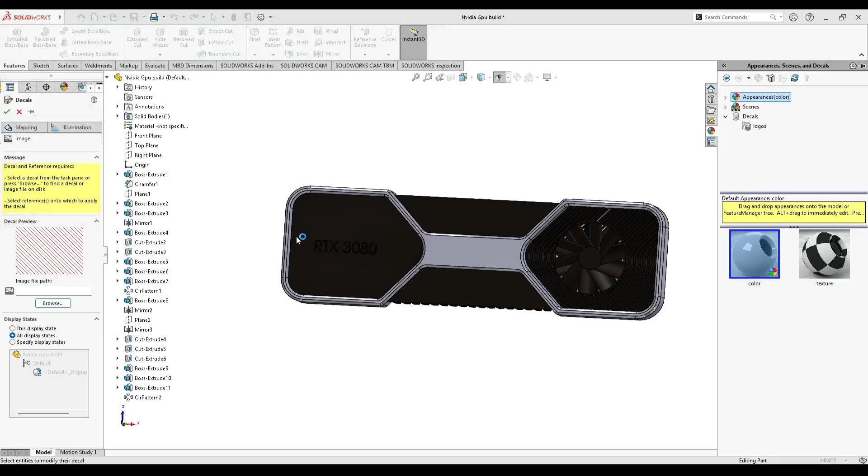When all of these elements, GPU die, VRAM layout, power delivery, thermal management, structural support, airflow optimization, and visual design are considered together, the RTX 3080 is not just a piece of hardware, but a highly optimized engineering system.

Modeling it in CAD with this knowledge allows you to create a model that is both visually realistic and technically informed. It helps you appreciate the interplay between performance, cooling, structure, and design, and it trains you to think like a professional engineer, where every feature has a purpose and every shape is optimized for function.